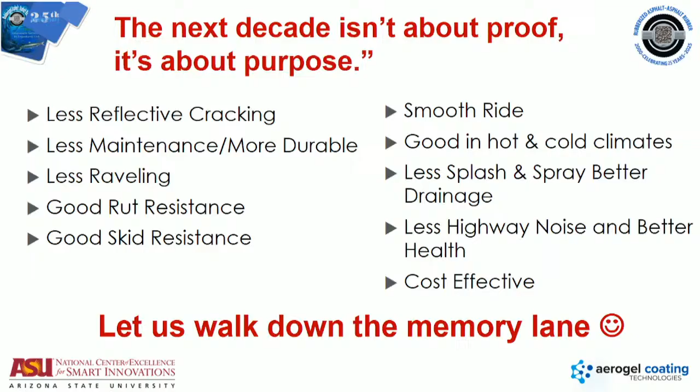The design for these mixtures was supposed to be a 10-year cycle - you come back, pull it out, and resurface it. Some of them actually lasted 15, and some are 20 years right now, still out there. Yeah, they have some issues, they age a little bit, they have some joint separation and all of that, but they've done wonderful. All the benefits in terms of splash, noise reduction, comparing to conventional friction courses that did not even last 6 or 7 years - just to give you an idea about the comparison. So that is the type of success that we have had.

Now, along with these types of friction courses, they came with a lot of bonus benefits, okay? What we defined in our community is the quality of life issues, the pollutant, the tire wear emissions. We documented that - George and I were in the tunnels, evaluating and trying to get all these numbers down. Exceptional performance, in terms of the amount of tire wear you get from an asphalt rubber surface versus a concrete surface in that case.

Reduction in urban heat island in terms of heat retention is one of the greatest benefits. I'll talk about that later, the thermal blanket effect that layer provides as a protection to whatever is underneath it, in this case Portland cement concrete.

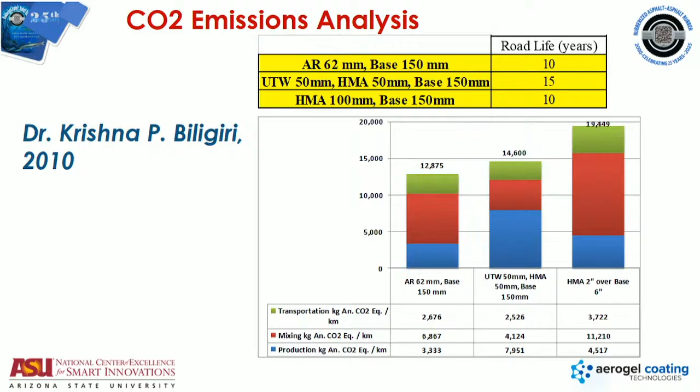So again, we win because of reduced thickness, and we win because of extended performance in these types of analysis. Needless to say, I can't imagine otherwise now.

We have tested every single angle, every test you know of in pavement engineering. Guess what, asphalt rubber has been evaluated through all of that. I cannot emphasize this enough, and it passed in most of these tests. But in some places where we didn't choose the right setting to conduct the test, we had some issues, and I'll talk about a couple of those, with a small message to address them.

Now, perfecting the process is very important. I'll recap this slide one last time. Choosing the right laboratory stresses when you apply any of those tests has to be equivalent to what those pavements see in the field.

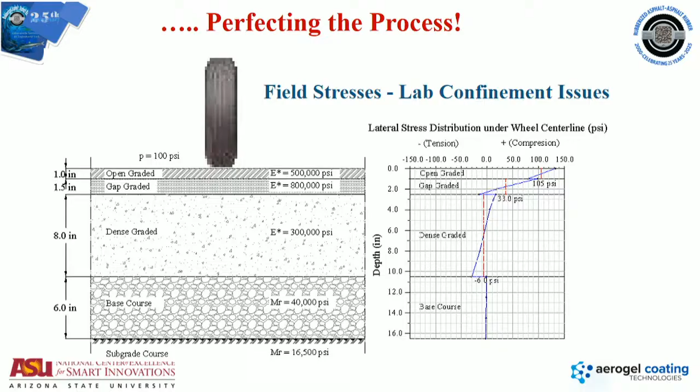We've established a lot of models over the years. Here's one example from another great professional, Krishna's colleague, back in 2010. She's at NCAT right now, Carolina Rodezno.

If you tell me what's the flow number, again, these are for gap-graded asphalt rubber mixtures, I can predict rutting performance based on the flow number, right? If you look up her dissertation, it's online, available for free. You can see a lot of these models out there. Tell me the traffic, tell me the thickness, do the test of the flow number, and you have some setting specifications, and guess what? We can evaluate how it's going to do on rutting and so forth, okay?

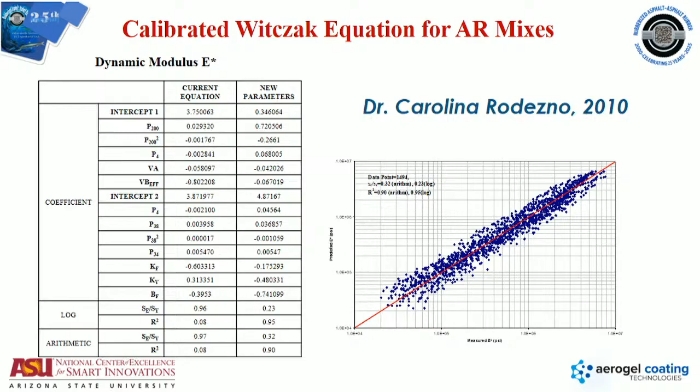So, actually there are a couple. What's the other Witczak equation, Krishna? There's a Shell equation people use for dynamic modulus. So we use the Witczak equation. Our previous mentor who passed away developed a prediction model for dynamic modulus. So we can do that for gap-graded mixes. It's available out there. You don't have to do testing. You can predict the approximate numbers and use it for that. And again, great result. The equation has been calibrated specifically for these types of asphalt rubber mixes.

And George and I, both Georges, we work on fatigue relationships, and we have all these coefficients. So when I asked that question early on for Krishna, are we calibrating? In our usage of the AASHTO software, Pavement ME, we have those coefficients that we can enter to have realistic output. Otherwise, your realistic analysis is not going to be there. So we use the K1, K2, K3 for all of these rubber mixtures that we have tested over the years.

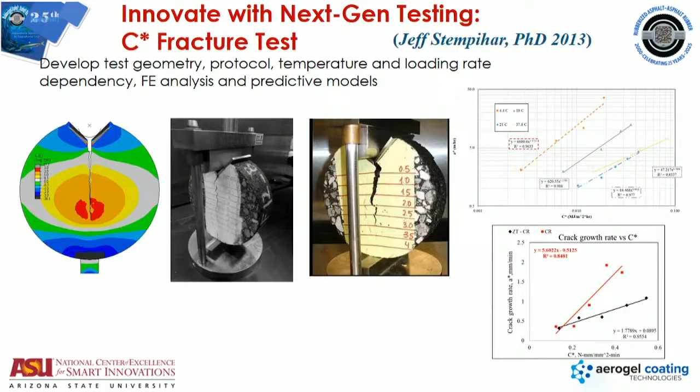Even moisture susceptibility test. This is a process by, he's now Dr. Atesh Nadkarni, and a lot of you here from the ASU group, you know who he is. He finished his doctorate at Texas A&M. But we developed a procedure to evaluate moisture damage using a modulus value, analogous to the TSR, but we called it ESR.

If I don't protect those samples in the test procedure, they might actually change shape, deform, just because of the nature of the unconfinement. So we provided the confinement, but we wanted that moisture to go through, and that's what we have been doing in terms of evaluating moisture damage and the ESR. Again, if you search it, there are some papers, publications, and reports, and so forth.

How are we doing here? I think we're doing great.

So the future of pavements really has to fit in this paradigm shift for smart, sustainable roadways, okay? And I will talk about a few of those examples and how we fit in. Climate resilience, there is no escape around it. Extreme climatic conditions are going to dictate how we deal with things, how we design future pavements, right?

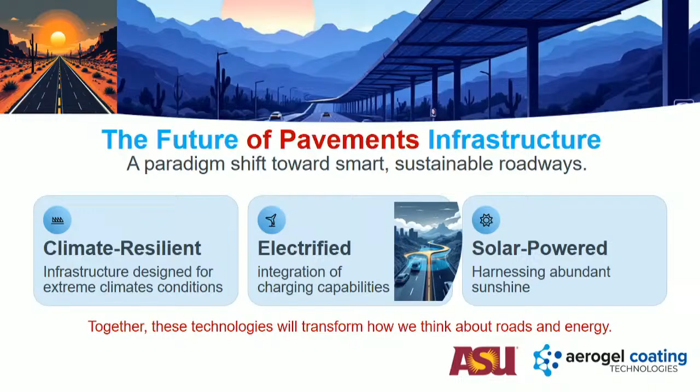And then the last one here, I heard the two Georges, and George Souza especially, dreaming up solar-powered roadways in the future. And guess what, it's not really far away. I think it's doable, very doable, right? So again, these technologies will eventually show us how to start thinking about roadway designs and selecting materials and so forth.

So the second part of my presentation, pathways to tomorrow's innovations. Some thoughts here on this. There is no escape. We're going to be continuing to use recycled materials, like crumb rubber from tires. We're going to be continuing to use RAP, recycled asphalt pavement, regardless, right? We have to find ways to make it work, how to put rejuvenators, how to select the proper percentages.

You will see a technology from Taiwan. They use 100% RAP, which has been kind of amazing in a way. Plastics, I think Krishna talked about plastic earlier today. So recycled materials is something we have to keep on our radar.

Energy efficiency also, there's no escape around it, especially in urban-centric infrastructure. Reduce urban heat island. In Phoenix, we estimate 40% of our landscape is roads, parking lots. And guess what? They add a lot to the heating mechanism. And it's a hot place to start with. So what type of technologies, what type of insulators, I'm going to talk about insulators later on, can really help in this aspect.

What about extended lifespan? I'm not going to elaborate because maybe I cannot elaborate on this. Look at this statement: the road of the future does not wear out, it updates. Think about a road that's not going to wear out, that just regenerates itself, revives itself all the time. So is it possible? Yeah, possible, right? Technologies are out there that can do that. But this is the future of how we are going to transform and design things.

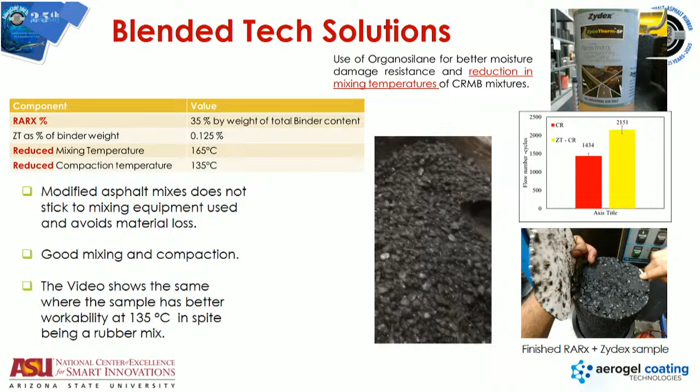If you are worried about these high temperatures, talking to Ezio this morning about overcooking binders, this will be the future of how we can take advantage of these types of technologies and so forth.

I do a lot of work with fibers. I've been doing it for 20 years. I love fibers. I think it's the best modifier ever that we have, in addition to crumb rubber. But the reason I say this, it does not take much. The cost is very low compared to everything else we have seen. And you don't have to change a mix design. You're putting some of these fibers in there in a specific way, and then you're getting a huge amount of benefits for the cost that you're putting in.

We have done, I didn't find the work, I'm sorry, but we have done fibers, again, combined technologies, the fusion of technology. We have done fibers with crumb rubber asphalt. Is it cost effective? Probably yes. I mean, all the benefit you get from the crumb rubber, right? In addition from fibers. Fibers are almost like good quality control, like a dummy-proof type of thing. You throw them in there, they help you to control the process.

Is Adrian here? Where's Andreas? Where's Andreas? Yep, you work with fibers. You know exactly what I'm talking about. And I mean, if you're talking, would love to hear what you have to say.

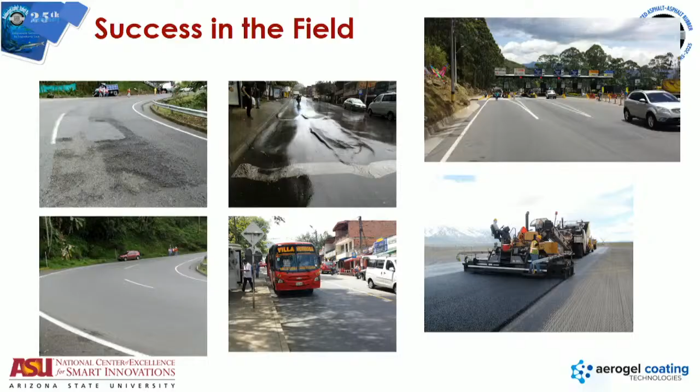You know, raveling and switchbacks and rutting and cracking. And I think this is an airfield in Wyoming at the bottom there. It was an open, actually, some type of an SMA mixture that also did very well. Krishna and maybe Alex and Jose, beside, oh, I've seen those over and over. Yeah, but they are great success stories, right?

So I want to wrap up here with the last 10 minutes or so, maybe less. So I talked about temperature impacts. Temperature impacts on pavements are drastic. Climatic effect and all of that is not only for deformation, but thermal cracking. The huge misconception about thermal cracking: a lot of people think thermal cracking only takes place in very cold climates. Alex is probably one of the few people who said, no, of course, I know because I've done all this work. Where does it happen?

It doesn't have to be in cold climate. It happens where you have a fluctuation of temperature. In Phoenix area, George built a parking lot for whatever experimentation you were doing at that time. It was fenced. No cars were even allowed to go in there. Did you get thermal cracking? You did. Why? Because of temperature fluctuation at higher. Going from like 35 degrees C to 45 degrees C is going to give you thermal cracking. You don't have to be at the low temperature.

So again, Carlos is here. Carlos talked yesterday. I want to expand a little bit, if I may. And we have, what kind of bird is this? Anybody knows? Raven? Crow. I think it's a crow. They are in Phoenix. You know the temperature in Phoenix? 46 C, 47. We push 50 sometimes in the summer. They survive. How do they survive? Anybody interested?

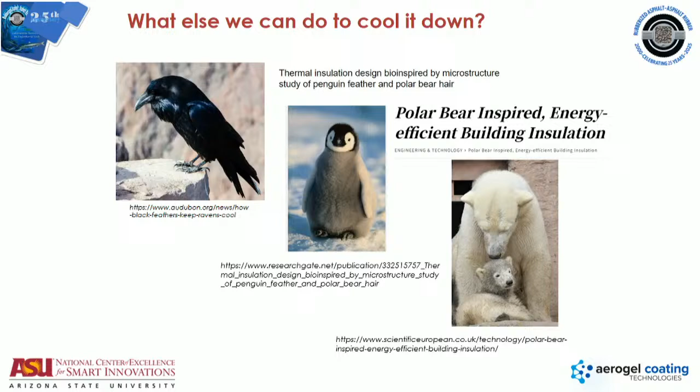So our inspiration when we talk about aerogel is increased porosity will be the key to reduce that temperature susceptibility. This is where we started, what was it, 6, 7 years ago, Carlos, Jose? It's been a while. And I have to put this cup of coffee in here because that was George Way's explanation when we had discussions over a couple of drinks of scotch here and there. He said, Kamil, I like what you're doing. It's exactly like a cup of coffee. I said, George, explain to me what's a cup of coffee. And I took that concept from him. Sorry, George, you did not patent it.

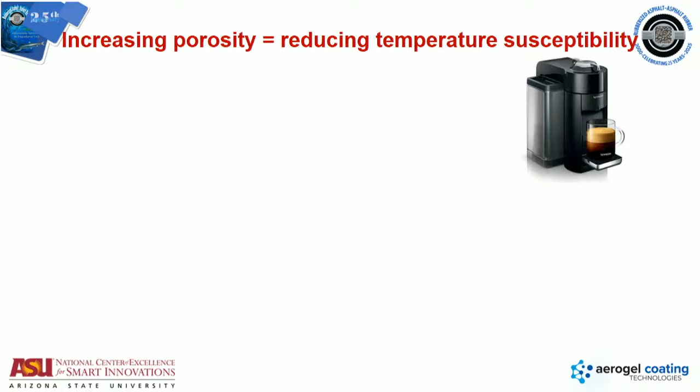But I have an espresso machine. With the espresso machine, we have this much longer coffee that you get here, right? But then when it finishes, you have that foam on top. And that foam instantly is cool when it's done. Why? Because of the porosity. It's a foam. Well, the coffee at the bottom is still hot, and it can maintain that heat if you don't touch it for a while.

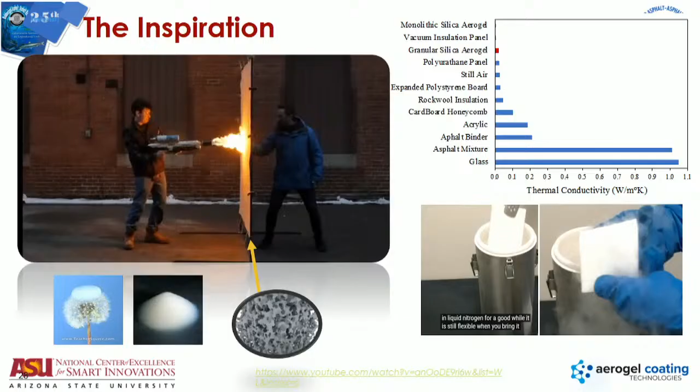Now, what we have done in our company, Aerogel Coating Technologies, the inspiration again: aerogel, what's aerogel? How can we use it? And Carlos did a great job talking about the history, but look at this. This is actually a blanket infused with aerogel and some other ingredients that has a fire resistance. Amazing, right? And the reason is nothing, George. Look at the bottom, the middle there. Look at the air void structure they have on each particle. It's very complex.

When they get all that liquid out, you end up with these little voids. This is really what provides that effectiveness of insulation that you use in coats, jackets, and everything else. And if I take one of these blankets and I put them in liquid nitrogen, if I put a tire in liquid nitrogen and I take it out and I try to hit it, what happens, George, to it? It shatters. Look what happened there.

Still flexible. You can go to YouTube. These are not our videos. These are actually, I should have put the links, I'm sorry. But they are actually still flexible. Why? Because of the insulation that it provided.

If you look at the thermal conductivity of a silica aerogel, you can even see it. It's above that red dot in 2 spots. It's like nothing, basically, right? So there is no thermal conductivity. That's what it's telling us there. So Carlos talked about the second generation of our product, which has aerogel, AMBX plus rubber. But this is our original.

I'm going to go very quickly here. And actually, it has a nice little video. Let's see if I can make it run. So here is the rubber alone, and I think we'll show you just a final image. A conventional binder, SBS binder, rubber binder, and then the aerogel binder. Last one standing. Of course, it melts eventually, but for the duration that we do.

And this is a brilliant test that Carlos developed to evaluate thermal susceptibility. So now we use this as a quality control for our product. When it comes in, you know, what works, what doesn't work. So again, amazing insulative properties. Little scientific fact how things develop in terms of thermal cracking.

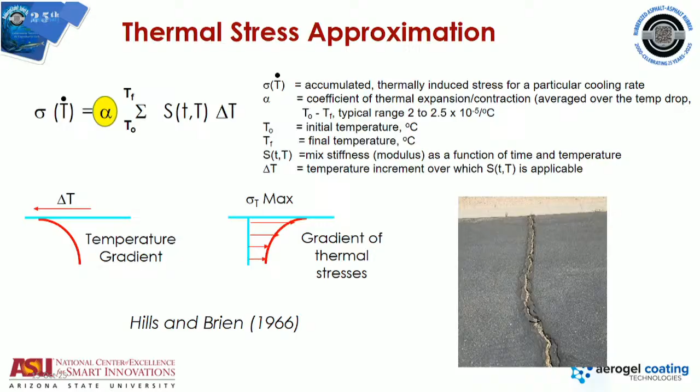Look at this again, you have a patent on this too? Not this one? Okay. Anyhow, this is a test where a sample sits on a frictionless surface, and then he cycles the temperature from 60 degrees C or 50 degrees C to -20 and up and down. But again, the message is look at the thermal coefficient of expansion.

The mix becomes insensitive to temperature fluctuation. That is the goal. Obviously, if you put too much of this aerogel, the material becomes brittle, more weak, right? So this is where the rubber comes in to help that or to optimize design. Done a lot of test sections. This is what Carlos talked about.

So our second generation product, we use the RAC, which is rubberized aerogel composite. Again, we take advantage of the crumb rubber with the aerogel to produce a super duper mix that can perform in a beautiful way. And I'll throw that out there. We have used technologies, Doug Carlson is out there, the Smart Mix, the RARX, and all of that, that can really help to fill in that gap for us here.

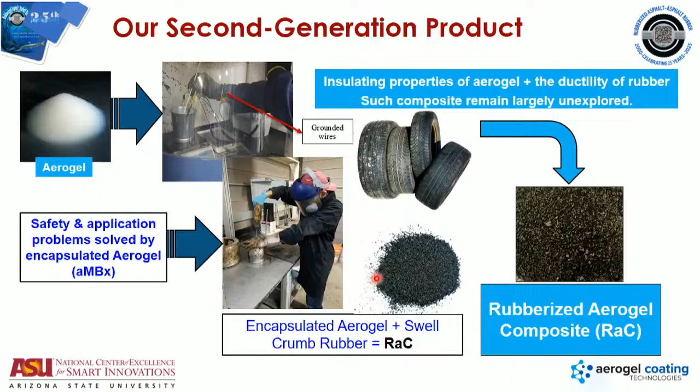Couple more slides, and I think I'll be just before my half an hour, my reduced time here. Be on the lookout for this technology. So again, we talk about this new concept, the new ideas, right?

So KHT, they have a booth out there. Is Tony here or no? They are sitting at the booth.

They use a resin modifier to use 100% RAP to have a cold mix. All these pictures were taken by me. I went to Taiwan, I was watching the process, how it's produced at the plant, how it's being placed, how it's being compacted. This guy in front of me was taking a reading, look at this, 33 degrees C.

That's the temperature of the mix going down and being compacted. They have a problem with the aggregates, so they try to use 100% RAP, and then they start adding crumb rubber to it. That's why they are here. This crumb rubber combined with these types of technology, the fusion of these technologies, are actually some of those features.

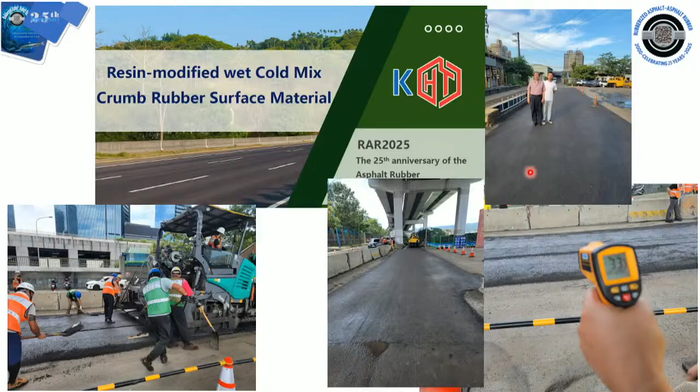I know there's a lot of product out there, but they have a highway section that's been put out there for the last 2 to 3 years. They have typhoons, or hurricanes as we call them in the US, excessive amounts of moisture and rain, and it's doing great. I've never seen anything like that in my life.

Okay, final thoughts. I hope we agree we don't need proofs anymore. Let's put that to the side and look for new ambition, new directions, new thoughts. Policy, obviously, is our bottleneck. It's not the performance anymore, right?

We talked about this, and maybe some of these thoughts could be for tomorrow's panel discussions, something you want to expand on. We over-proved the technology, but we under-communicated its value, especially with policymakers. I think this is really where we face our biggest problems nowadays.

I put this together after I listened to George Way yesterday. I think, yes, AI, we do everything in AI nowadays. Imagine AI-assisted mix design and predictive modeling. Imagine you don't have to do anything in the lab, you just do everything by an AI algorithm. Would that be acceptable to you as a designer? Would you be comfortable? Why not?

We can train these models. We have the information, we have the technology. So performance-based specification with real-time feedback loops, and all of that, just simulations. We don't really have to spend maybe more time in the lab if we have all the right components in there. We have to close the loop on this circular economy.

I think Alex did a great job talking about it, but the carbon valuation, we have EPDs, environmental product declarations, and this is something big. Products have to document their value, their CO2 footprint, their life cycle assessment, and so forth. I think this is really something we can build more on, instead of focusing on proving that crumb rubber is really doing great. It's doing great, we don't really need those proofs anymore.

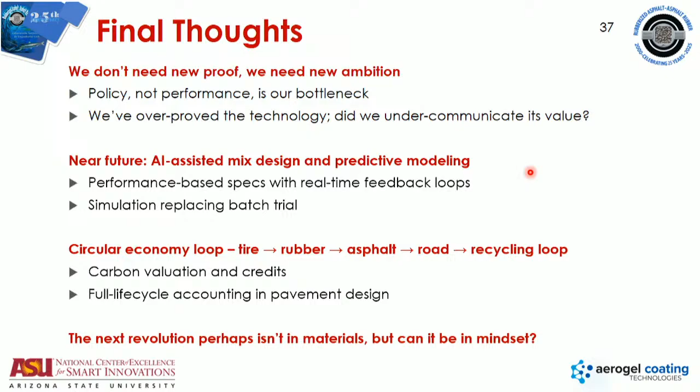I have a question for you. Yes, sir. The mic is not on for people.

Push it, just push the button, yeah.

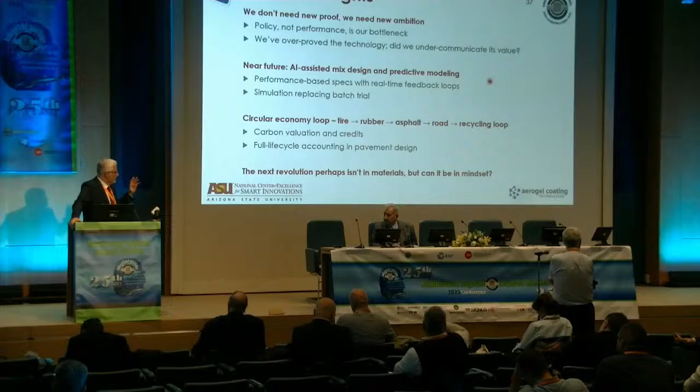So basically what you described is a thermal fatigue phenomena, cyclic stresses due to temperature variations. By using the aerogel, you're reducing strains in the material. You're insulating the temperature, so you have longer fatigue life. Not necessarily lowering the temperature, I am reducing the temperature fluctuation. The temperature might stay at a certain value depending on thick versus thin designs. For example, with concrete and porous asphalt on top, we found the average temperature stays higher than without the cover, but the temperature differential from top to bottom is reduced, and that's what we're after - reducing temperature changes in the layer to minimize the thermal stress. So it's thermal fatigue stress, but we shield it by designing a certain amount of particles in there to achieve that.

Yes, thank you, go ahead. Here comes trouble. So it's very interesting technology. Congratulations. Thank you, it's great to see new ideas in the industry.

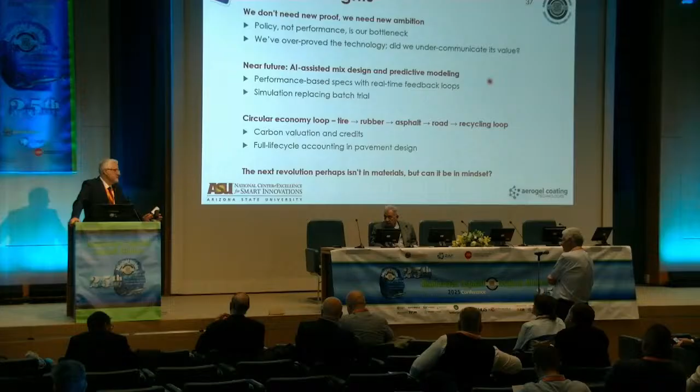How do you feel when you look at this product with ages? You live in a very extreme location for aging of materials - at 1 year, 2 years, 3 years, 5 years aging, how do you feel it might perform? So we don't have a lot of data on aging yet, this is coming. But anytime you reduce thermal stress, you would expect, logically, to have less aging compared to a conventional mix. If I can shield my pavement completely, there's no aging going to take place, or minimal aging.

Now you had that great slide with the flamethrower on the pavement. If you look - not pavement, it wasn't pavement, yeah. If you put that on the pavement, do you think you can go through many cycles?

A very good question. In fact, Carlos will be speaking in November at our conference about fire resistance pavements. We haven't done a lot of work in this area, but these particles will serve toward that goal. They might not be completely fireproof, but they will help reduce - for example, in Arizona we have a lot of fires during certain seasons. If we can put our product in areas we know are potentially for fires to sweep through the roadway, we give people a chance to travel these roadways before they completely disappear or melt out. So we feel we can provide that protection with these particles, but we don't really have all the data to document it yet.

Fire retardant materials are actually quite important in the asphalt space in certain markets. So thank you very much. Thank you, thank you, appreciate it. Go ahead.

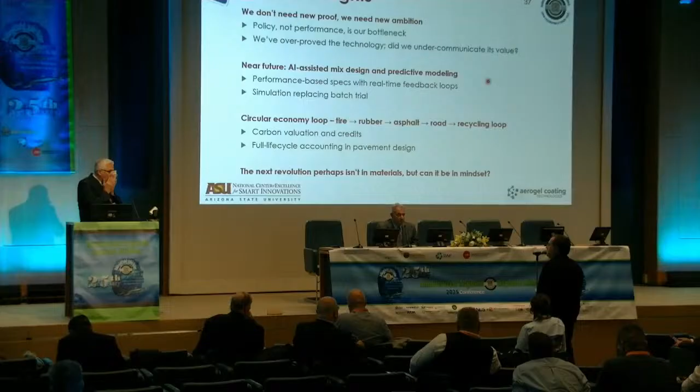Two questions. One question: when we're adding the rubber product, can we see some reduction of bitumen when you use the combined technologies, rubber and aerogel? I think the idea is our particles will have additional binder anyhow because they are pre-coated, so it might give an option to reduce some of the binder content, but it doesn't really affect it this way, Carlos? Okay, so I would say that doesn't.

The question is about this thin layer of asphalt, what you remove from the concrete - how is the connection between this and the thermal cracks? Are you cutting it, or what happens with thermal cracks? So the resiliency, like George Souza explained, this is 5 times the resiliency with the rubber, so you get the benefit there. Any joints or potential cracks in the pavement do not really reflect through, it's kind of hard. Now if they do, they are much reduced in width compared to conventional mixes - we have seen that.

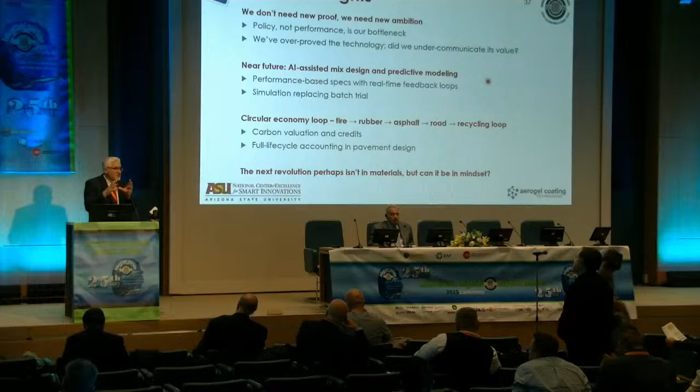But again, this is a friction course layer, it's not intended to be an interceptor to any major cracks or joint movements. So just accept that it's more of a thermal blanket, friction, splash resistance and so forth - its function is designed for other benefits, but not necessarily to solve major joint issues you might have. I think we apply a tack coat before you put it down, and this is how you bond it - just like a regular tack coat.

No SAMI, no, this is the friction course. When we do a gap-graded mix, like the one in Jakarta that George Souza showed, he used a SAMI, then put the gap grade and the friction course on top. So in that case, yes, because it was more of structural sealing and adding more benefit. But in our case, we were looking for other benefits, not necessarily the structural capacity and so forth.

It looks like George ran out of chocolate today. He's not distributing chocolate. He has a lot of chocolates, yeah. Oh, there is? Okay, well, go ahead.

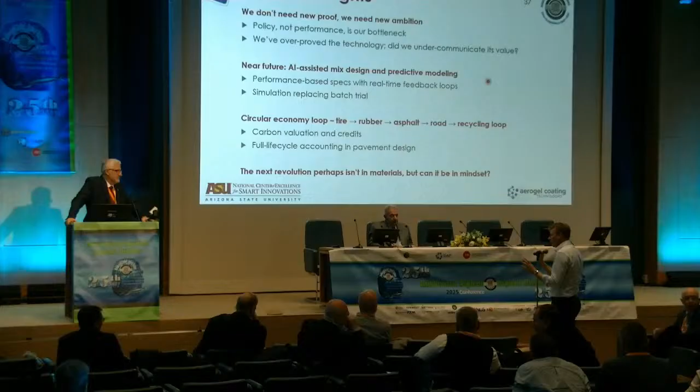Do we have time for another one? I think so. Thank you for a very nice presentation. I think the last slide here was a very interesting conclusion about the communication. But I think the research going forward is also important, and maybe we should also shift our focus into how to actually communicate and sell, and how to penetrate the layer of denial and ignorance that we still see out there in some markets. So maybe to advocate for future topics at this conference, we would also attract more people.

Thank you, I think it's really, yeah, thank you. Thank you for the feedback, it's like in politics. This slide can go for politics as well, right? I mean, it's the same thing. It's what we do in our community. So yeah, thank you, appreciate that comment.

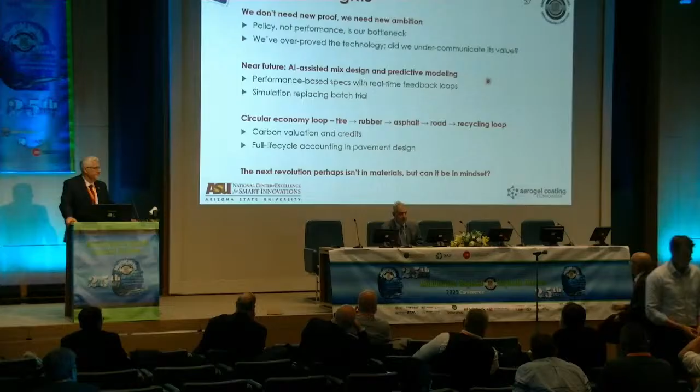Thank you, thank you, let me go. Nice job, thank you.

Our next speaker, I don't see her. Antunes' evaluation of sustainable pavement construction and maintenance using multi-recycled RAP mixtures.

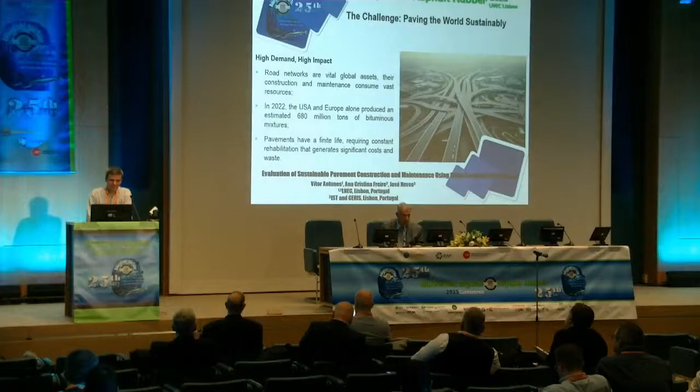Sorry for that, but the PowerPoint is advancing the slides after some time. Well, as we know, the road networks are very important for societies, for the countries, for their development. We know that. It's true for everyone in every place of the world.

In 2022, only USA and Europe produced around 680 million tons of bituminous mixtures. It's a huge number, only these two continents.

We know that, and we are talking about pavements, and the pavements need to be maintained or rehabilitated after some time. For this, we need to replace or substitute the layers, namely the surface course. With these maintenance actions and rehabilitation, we produce RAP. RAP is a material that comes from the old pavements, as everybody knows in this room, of course. And this is an excellent material - we have aggregates and we have bitumen, the two raw materials to produce bituminous mixtures. To shift to a circular economy, we need to use that material, and with this material we can have a sustainable pavement management.

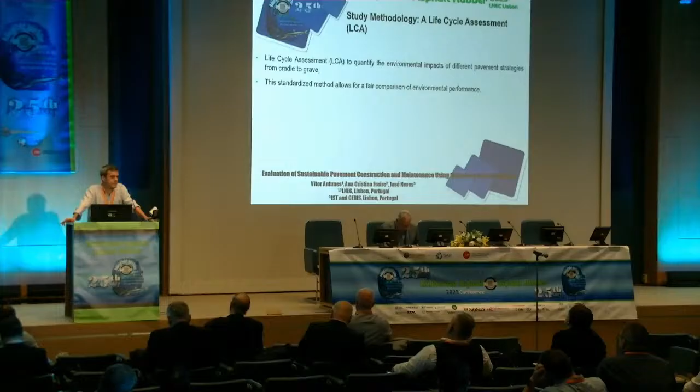To assess this, we can perform some life cycle assessment to quantify the environmental impact, but it's important also to quantify the sustainability overall, considering the economic impact, the social impact, and the environmental impact. The LCA is a standardized method and allows us to perform a fair comparison between the scenarios that we want to analyze.

In our case, we define the functional unit as 1 kilometer road from the Portuguese road network. It's a 2-lane road section with 7 meters width, and we analyze over a period of 36 years. We have two scenarios: scenario A, the real scenario, with the millings and rehabilitations that were really performed, and scenario B, the same scenario but the sustainable one, using some amounts of RAP. We define 25, 50, 75, and 100% of RAP by performing hot mix recycling.

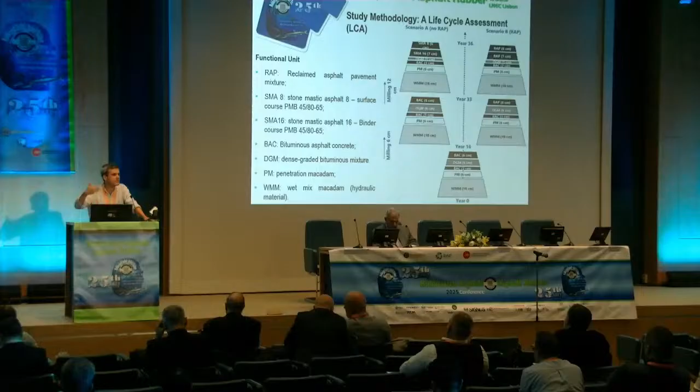We have these structures, and we have the different layers and the milling actions at year 16 and at year 33. For the second milling, we considered that we use the previous mixture with RAP. And because of that, we are talking about multi-recycling, recycling the mixtures several times, of course, using rejuvenators.

To perform the analysis, we use the SimaPro software, combined with the Ecoinvent database, and some consultation of the Portuguese paving industry to complement some variables with real data from Portugal. To assess the impact categories, we use the endpoint normalization and the midpoint impact categories using the IMPACT 2002+ method. And we have 15 characterization factors and 4 damage categories.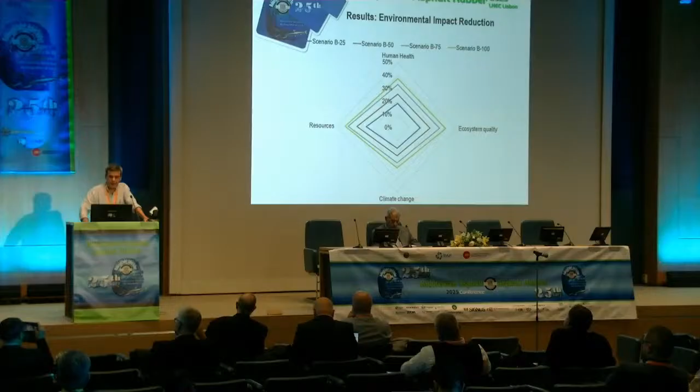This represents a significant reduction in terms of virgin materials consumption, because we are using a material that allows us to reduce the amount of material that we need to extract from nature.

We have a reduction also in terms of environmental footprint, because we are reducing transportation, and the processes associated with processing RAP to incorporate in these new bituminous mixtures are very small, because we are talking about grading and crushing only, and we are reducing transport as we have material closer to the asphalt plant.

Multi-recycling improves this reduction in terms of impact factors from virgin material reduction, less transportation and improved energy efficiency. And we improve also, they are all connected, the energy needs, because we are reducing transportation, we are reducing the extraction of raw materials, and we are reducing the actions to produce bituminous mixtures, as we can also incorporate, for example, warm mix asphalt to produce this type of mixture.

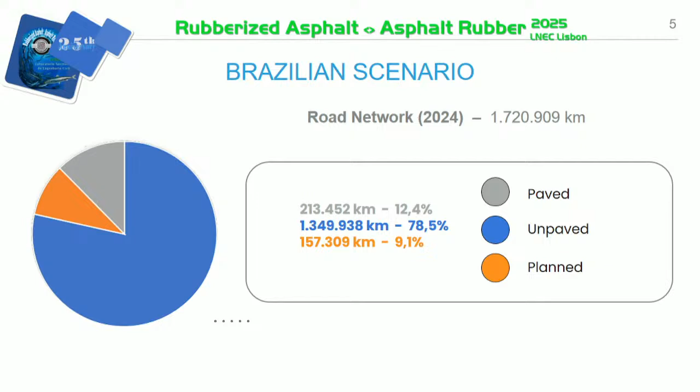Brazil has approximately 125 million vehicles. Each year, around 450 thousand tons of scrap tires are discarded, equivalent to about 90 million individual units. It's a big country. CONAMA resolution requires the collection and proper disposal of used tires, establishing a ratio of one recycled tire for every new tire.

Pavement chains in Brazil. More than 90% of asphalt used in Brazil is produced by Petrobras, the company responsible for manufacturing asphalt cement. Asphalt in Brazil is still classified according to the penetration test, and two main grades are commonly used: AC 50/70 and AC 30/45. The country is currently in a transition phase toward the performance grade PG classification system, which is expected to be fully adopted soon.

The distribution of asphalt cement is carried out by transportation companies using their tank trucks. These trucks collect the asphalt cement directly from the Petrobras refinery. Part of it is delivered to hot mix asphalt plants, while another portion goes to asphalt distributors. The distributors modify the asphalt cement, produce and market asphalt emulsion, and modify asphalt with polymers, SBS, and crumb rubber.

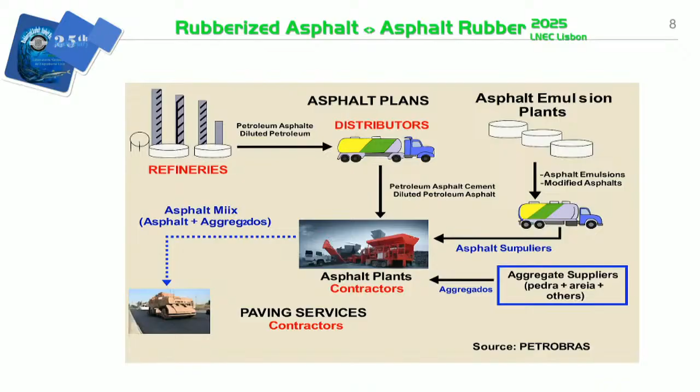Therefore, it's important to establish the methodology to evaluate the solubility of asphalt rubber in trichloroethylene, the most used solvent in Brazil. This allows for proper assessment of storage and handling conditions of asphalt rubber in customer tanks, as each production and storage process might have its own characteristics. ASTM D6114 is the base.

Asphalt rubber is defined by ASTM as a composition of asphalt cement, ground tire rubber, and additives, containing a minimum of 15% rubber by total weight of the mixture. It's crumb rubber, and two machines. In the production of asphalt rubber for this study, two types of mixers were used. The low shear mixer was employed only for the dispersion and swelling of the ground tire rubber, while the high shear mixer was used to extract the polymer components present in the tire. The portion of the tire utilized is the tread layer, which contains the highest concentration of polymers.

Now, we can observe all the constituents of crumb rubber. To produce this material, it's essential that rubber powder exhibits a high level of purity. It must be free from steel and nylon, and we have to control particle size distribution.

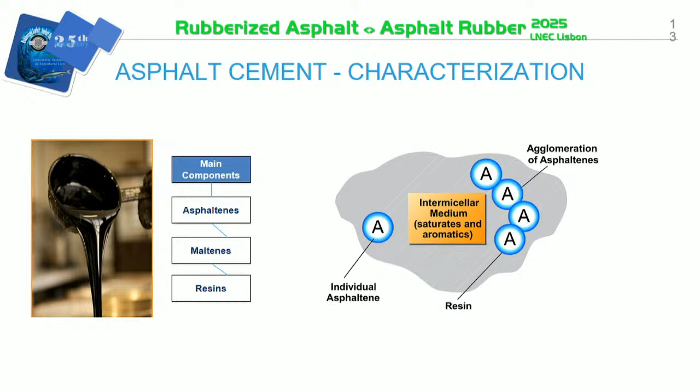Therefore, it is necessary to adjust the formulation of the asphalt cement using rejuvenation agents to restore the proper chemical equilibrium and ensure consistency and performance. The different types of crumb rubber were analyzed in order to determine which sample would be most suitable for the study. The sample with the highest degree of purity was selected for further testing.

The study focused on the wet process methodology, which involves the dispersion of solid particles into a liquid at high temperature, followed by a high shear mixer. The process time for sample production was 4 hours. Presented here are some of the results obtained after the dispersion and high shear mixing stages.

The dispersal and solubilization of rubber in the asphalt binder were observed through several behavior changes, including an increase in softening point, a reduction in the penetration, and an improvement in the elastic recovery of the binder. The study focused on crumb rubber type 1, which exhibits greater elastic recovery and high polymer content compared to the other samples. The penetration value decreased, while both the softening point and dynamic viscosity increased, reaching nearly 2,000 cP.

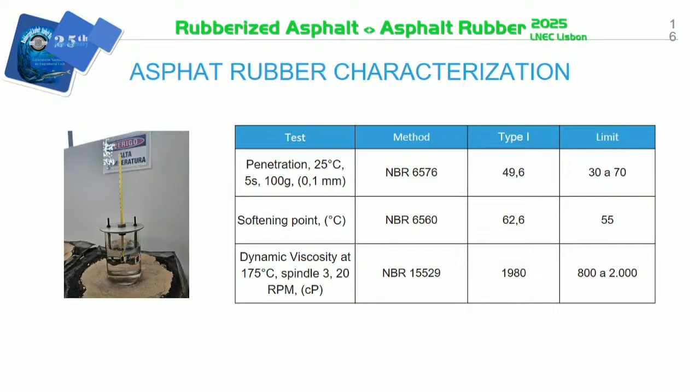Laboratory tests and machines. Here are the laboratory instruments used in the study. The rolling thin film oven, which simulates short-term aging, the dynamic shear rheometer, DSR, and the solubility in trichloroethylene apparatus.

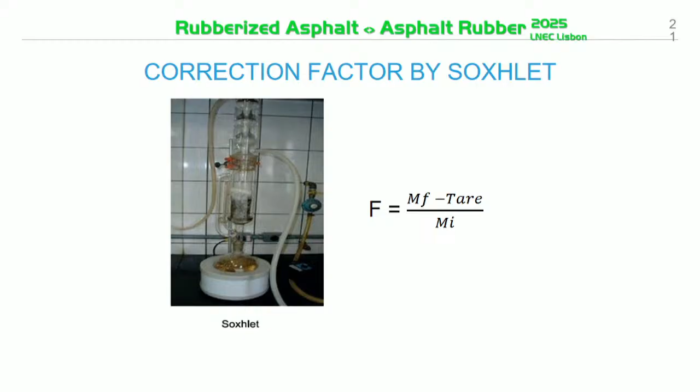And in conclusion, the Soxhlet extraction method is effective to determine the insoluble content in rubberized asphalt samples. The solubility in trichloroethylene is directly related to the purity of the crumb rubber, influenced by carbon black, metals, and textile fibers. It is recommended to perform a test during production and storage, with continuous recirculation and agitation to ensure proper rubber dispersion.

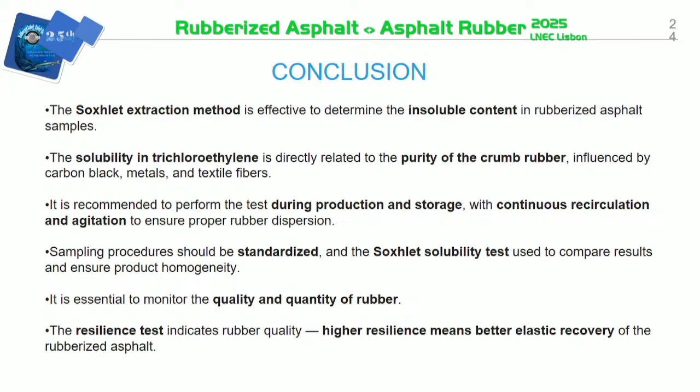Sampling procedures should be standardized and Soxhlet solubility tests used to compare results and ensure product homogeneity. It's essential to monitor the quality of rubber. The resilience test indicates rubber quality. High resilience means better elastic recovery in rubberized asphalt. Okay? Thank you.

May I? Go ahead. Hello, I'm presenting this on behalf of, no, not this one. Angelo Pinto. What is the presentation name? 15, 14? It's not here today. Fernanda.

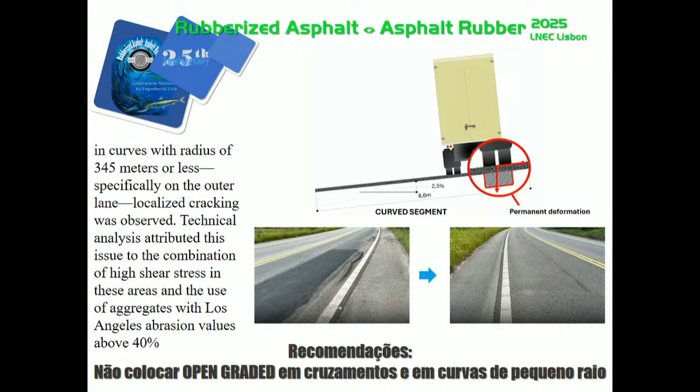It's reminding me that these only happen on curves with the radius less than 345 meters, because of the high shear stresses. This was 33 kilometers long. What was there before was, you and I both know, horrible. This is 15 years old.

When we did this to begin with, we didn't know it was going to last 5 years, because of this LA thing, 10 years, whatever. But notwithstanding these few curves, this is a fantastic project. I think that's what should be brought to people's attention, the amount of savings here. This is now, to me, one of the perennial stretches of the roads I drove in Brazil. Tremendous performance. Maybe a little more should be made out of that, rather than something happening here that's an anomaly.

But by the same token, the whole road was built with this aggregate that we're concerned about. This was brand new, everything. In some ways, this is not exactly what we had in mind, because we were thinking of putting a SAMI down. But we didn't do it, because the aggregate was not good. But it is why it's important to show that the structural performance is excellent.

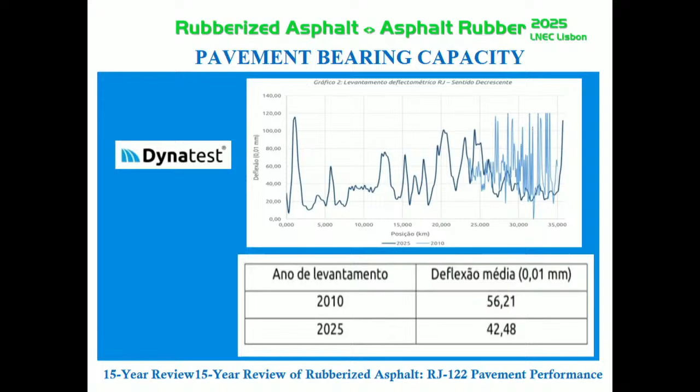Yes. Well, all I'm going to say is this was a great job, and we did fantastic work here, but we couldn't have done it without Angelo and all of his good work. And these little rut things are an anomaly of 33 kilometers of a road that was horrible to begin with. Think of the savings, as you showed in that one slide. Huge savings. The alternative would cost much, much more. That's another paper where we already show this. Even that aggregate was on the entire project, right? Exactly. So to me, this is a validation of exactly what Emil was talking about.

Over and over again, we have evidence of tremendous success. And at times, maybe we dwell too much on the little things. This, to me, I think, is minor. You want to have a question? Okay, can I? Angelo wants.

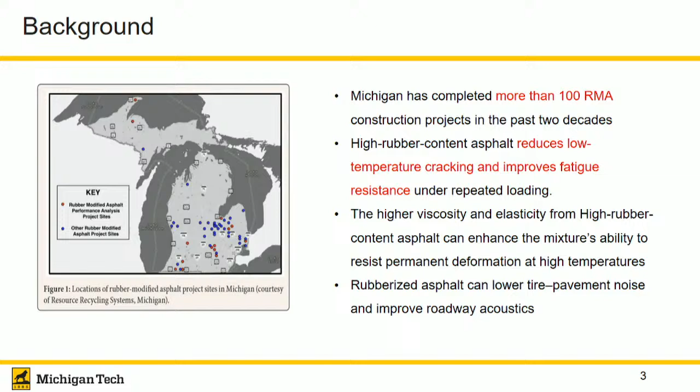That means about 640 kilometers of lane miles. That is the current situation.

Next, I'm going to show a few examples of case studies. We have a few places where we built those projects. Some projects I think are really interesting, and I really want to show what that is about.

The first project is in Kalamazoo - the place where the COVID vaccine was born. In this project, we have a few miles long stretch, and we divided it into several different sections: some are control sections, some are other sections.

We also have rubber asphalt sections and chip seal sections. The chip seal is pretty much similar to what Arizona did, and also what California did with rubber asphalt chip seal. So that's the reason we have 4 different sections here.

So I'm going to show you one section here, and in this picture you can see one gentleman wearing a hat. If you look around the room, if you see anybody wearing a hat here, this is a handsome guy. All right, so now the hat is gone.

This guy - I work with this gentleman, Dr. George Souza - we worked on this project together. This was one of the first projects where we attempted to use a really high content of rubber materials. This is the dry process. It was the first project we tried it on, and the construction, everything went fine.

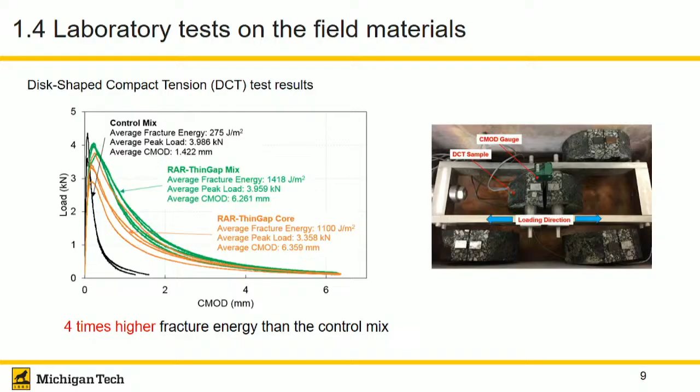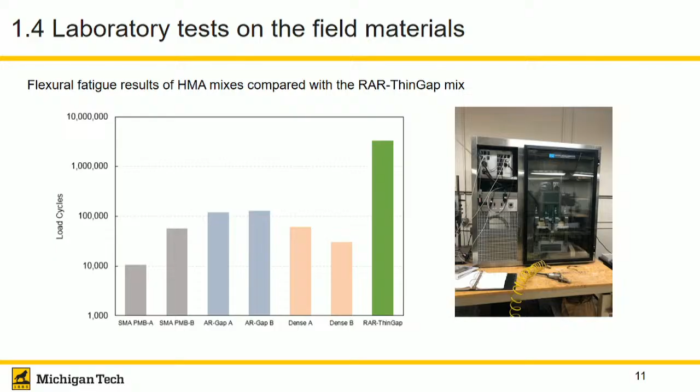We also measure the flexure fatigue, basically trying to find out the fatigue life. The control asphalt, which is the gray bar in front, you see it's pretty low, but the rubber asphalt is pretty decent, right? Very good - several magnitudes higher. So that gives us pretty much confidence about the materials we're using.

So at this speed - this is one question we discussed with Dr. George Souza, and at that time there weren't many Teslas available. He encouraged me to find a Tesla and drive on it, to find out what the noise reduction quality looks like. Anyway, eventually we did not get a Tesla - we got a diesel truck, but that's okay.

So what my point here is, there's a lot of really good performance we found here. We pretty much verified that crack resistance at low temperature is really good - you get very good fracture energy resistance and very good fatigue resistance, 50 times better, right?

And of course the other thing is about the noise level - it has been improved quite a bit, right? On average about 2.5 decibel points, but in some cases 4 or 2, about those ranges. The rutting resistance is also good. So what else do you want, right? That's pretty good.

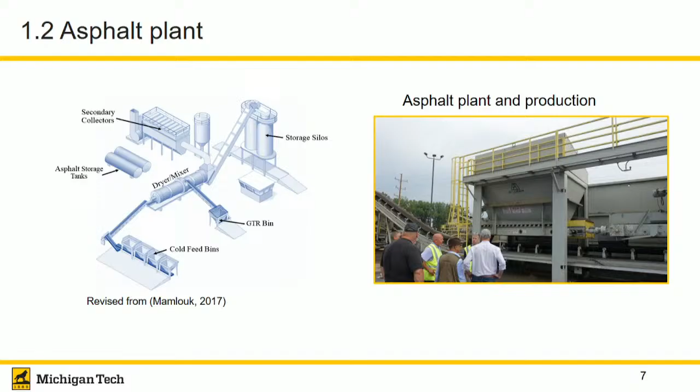So this is the project we have here. It's called the 6 Mile Road - a total of 6 miles stretch as control section and about 2.3 miles as our rubber asphalt sections.

So this road was in a pretty bad situation - I'm going to show you how bad it is in just a few minutes. What we designed here, the underneath was concrete pavement over 100 years old. They patched it a few times and added asphalt on top over the years, so now you see bigger cracks happening - it's a very bumpy road.

This road is called Dixie Highway. For people really in the U.S., they know this is a Dixie Highway road - it's very famous, right? Because from here this road goes all the way to Miami, Florida. Anyway, I don't want to talk too much about the history, but really the pavement surface is bad. So eventually what we designed was a rubber asphalt chip seal as a SAMI layer, and then on top we put 2 layers of rubber asphalt.

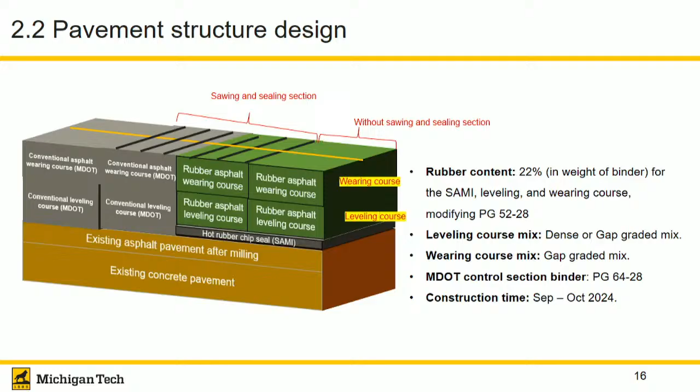So anyway, here's what the condition looked like. It's very bad, right? Very bad. So here is what we did.

Okay, so first we need to mill a little bit off. It's roughly about a 2-inch, so about 5 centimeters, of material off. So we mill it, and then we have rubber asphalt

materials to apply on it. This is hot rubber asphalt, not emulsions, not emulsions. So then with that, you apply chips. This is the exact same thing like Dr. Souza and I did in Kalamazoo for a different sectional project.

So this material here is a raw material. It's just the rubber strip that you get from tires. Without any process, without surface treatment or anything, we have to cook this for a longer time. After that, the project is cleaned up, and then this SAMI layer is kind of ready, right? It's kind of ready, you clean up.

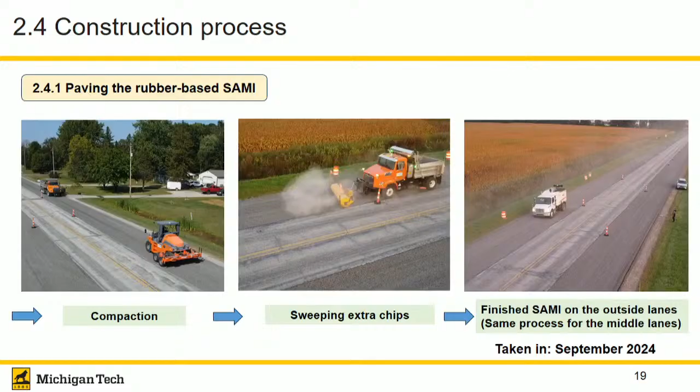And then, of course, we place it on. This is how they prepared the materials here. So how they really prepare it from the PG 52-28, and how to really modify it with rubber materials.

So then, with the high content rubber materials here, roughly it's 22% by weight for the binder. So it's pretty high content here. And of course, the temperature used here was a pretty decent temperature, very decent. All right, here is when the rubber asphalt was prepared.

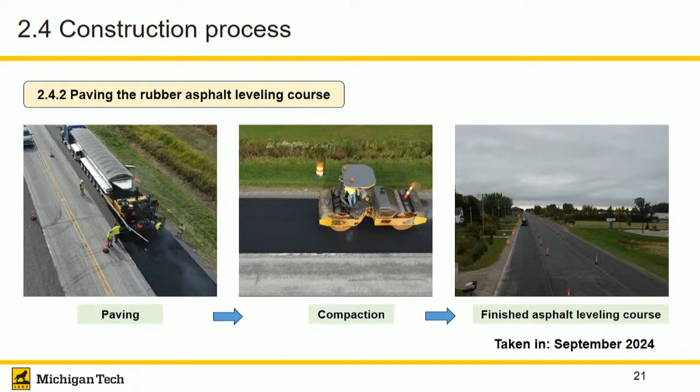Of course, this is the wet process. The previous project I mentioned to you, that was actually the dry process project. Here's the wet one. So this wet one, because of 2 layers, they get the first layer on, and after that, we get a wearing course, same process. The good thing for this project was the 2 layers used the same asphalt materials.

Of course, we also have the other 6 miles of roads. Those are the control materials we are using. Those are using DOT's standard mix design.

All right, here is what the construction process looked like. You can see this is them spraying tack coat. This tack coat has to be emulsions for this case. We eventually constructed the middle 2 lanes, and then just constructed the outer 2 lanes. This is a total of 4-lane roads.

So anyway, you can see this was the construction site, in 2024. After the compaction, after finishing the construction, things are looking pretty good. We did a lot of lab work, trying to re-verify a lot of things here.

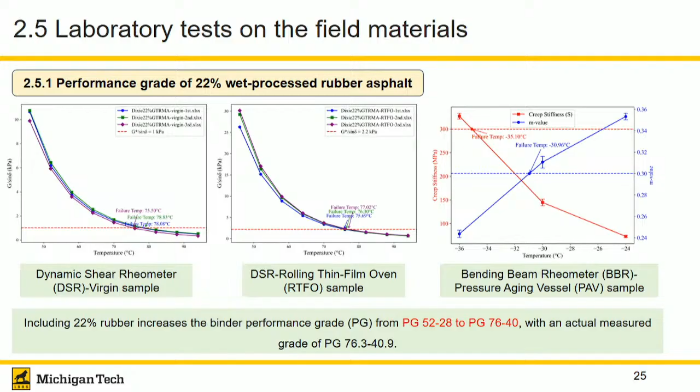I'm going to just maybe skip these things. So we tested a bunch of things like DSR, RTFO, after the aging, after long-term aging, to see what the performance looks like, just to re-verify what the new PG should be. For the mixture testing, we tested a lot with Hamburg wheel testing machines. We ran the APA testing, all kinds of diagnostics we have.

Anyway, we also tested our favorite testing called the DCT here again. We also tested ideal CT, that's another thing people are using. But really what my point here is, the cracking resistance gets pretty good, right? This one gets 4.4 times better than the regular materials.

And we tested a bunch of other things like dynamic modulus, because in the design we have a component trying to do a pseudo mechanical empirical design. We have that in our mind. We think this road is going to be a perpetual pavement, because the foundation was good, old concrete, even though it's 100 years old. There's some decent asphalt layer on top. Plus these 2 layers of new asphalt should last for a long time. Right, let's see what happened next.

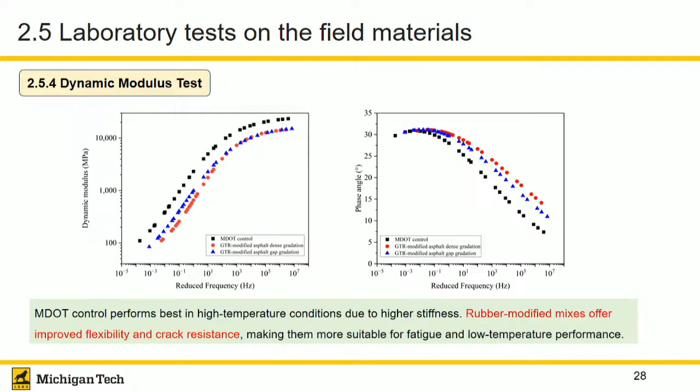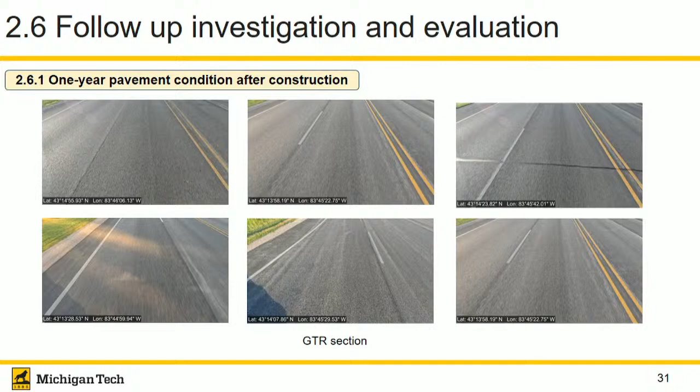All right, so let's summarize this project. It's 6 miles of control asphalt, 2.3 miles of rubber asphalt. So the total rubber asphalt we used here was 17,000 tons. That's probably one of the largest projects ever in Michigan. So that's the reason I said large. But of course, compared to some projects we have, it's not really that big. All right, so we should be okay.

So this is all the things. Of course, the project is wet processing. Crack resistance improved, moisture resistance is good, rutting resistance is good, fatigue life is good. And the construction was smooth. Of course, we learned a lot of things along the way, but in general, it's a pretty good experience.

This is my second project I want to show you. This place was also relatively cold, but not as cold as the other project I'm going to show you. This project is called the Dickinson County project. Dickinson County is over here. You see, this is the Upper Peninsula portion, this is the lower Michigan part, and it's right here. So it's pretty cold here. This road is called County Road 573. It's a cold road, an old road also. It connects the mines and the logging areas, so a lot of logging trucks, mine trucks.

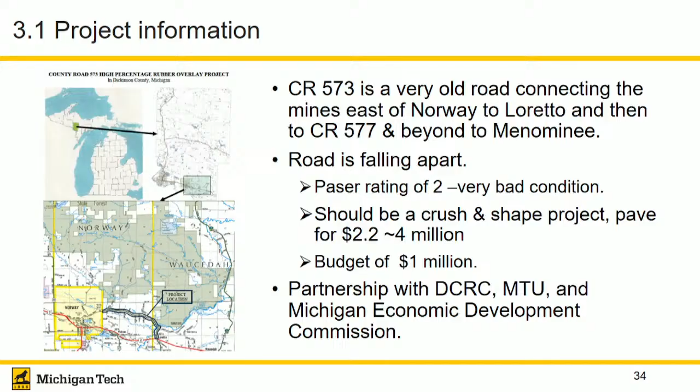All right, so it's a pretty long stretch of road. You see what the road looked like. This road was built in 1989, never touched. And the other piece of road connected to it was built in 1993, never touched. So pretty much a long time, right? A long time, not much work done, and it's cracked like that. So it's a very bumpy road for the logging trucks and mining trucks.

Of course, I have a video here, but we probably don't have time to show it. We can just skip it, I guess.

All right. So of course we did a lot of lab work as well. We tested all the binder properties. If you take a look on the right-hand side, this is the rubber modified asphalt with 20% rubber in it. So the binder really got improved quite a bit. You see the temperature is bumped almost 20 degrees C, right? On the rutting resistance side. So that's really very good.

Of course, we have a lot of data showing what the actual PG looks like. I'm going to show you something. For example, we also tested something called the asphalt binder cracking device test. It's basically trying to see at what temperature the asphalt binder will start to crack. The conventional asphalt will crack at around -40. This is fresh asphalt, not aged. And the other one, after we make rubber asphalt, you can see it cracked at around -50 degrees C.

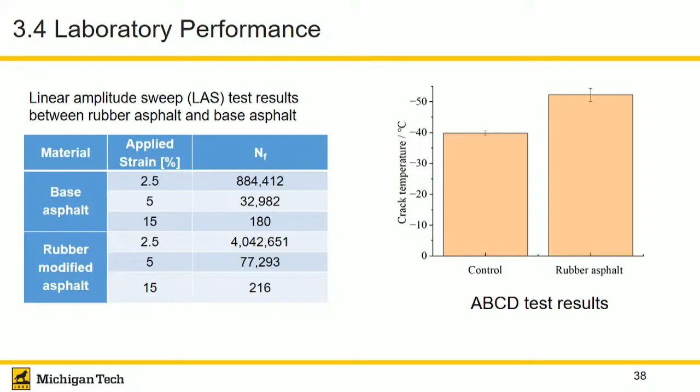without really sufficient budget. All right, so what we did was we also tried to do the mix design, just to help them get the design ready. And we measured the rutting performance and measured the fracture resistance. And of course, the fracture resistance improved quite a bit. For example, here, the 500 joules per square meter, we can improve that to like 650 or so, right? That's one of the results I really want to show you. And the rutting resistance also got improved.

And here's before the construction, the road was looking really very bad. But after construction, you see it's pretty decent, right? Well, this is the U.S. Of course, the center line is always yellow, right? It means don't go through. All right, don't pass.

And the Bay County one, this one is also another similar project. This has been almost 5 years. That's the reason I really want to show that one here. This one I think is a project we worked on with Liberty Tire. Liberty Tire, are they here? All right, great. If you're not here, I'm not going to talk about it.

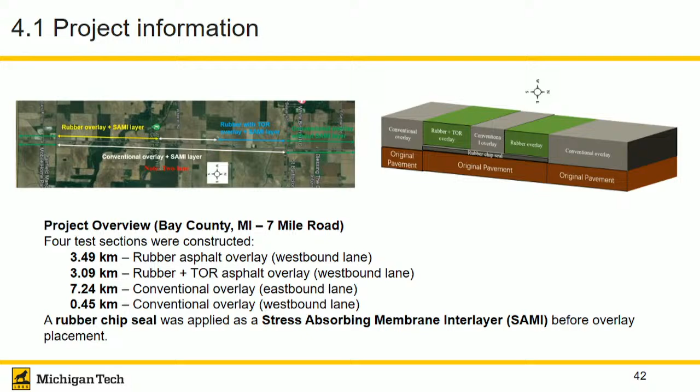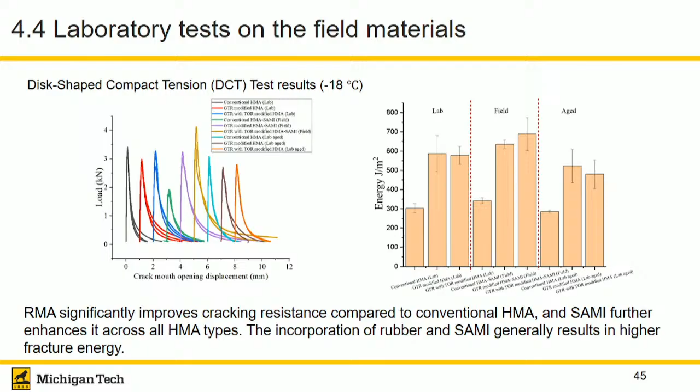And I also want to have one slide showing what the actual fracture energy looks like. On the left-hand side, all the first bars, this one is conventional, this is conventional, this one's conventional, but the rubber asphalt, you see they almost double the fracture resistance. That's really good, right? That really means the road is not likely going to crack, or it's very difficult to get a crack. I have results to prove that. All right, we also tested rutting, and I'm going to skip this one for now.

And we test all the noise levels. So for all the rubber asphalt we see, even at different test speeds, usually the rubber asphalt is quieter compared with the new conventional asphalt materials. All right, so that's the noise level.

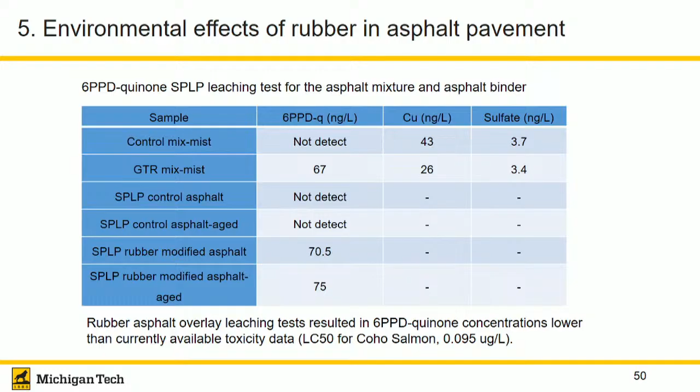The limit was 0.095 microgram per liter. So that means we are still not in that range yet. But of course, we are researching more things here.

Another project, instead of on the roads, we constructed with TDA, tire derived aggregates. In this project we also measured zinc, iron, magnesium, and copper. Eventually, the leaching potential was still lower than the suggested maximum value. Of course, this is not the end. We are at the very beginning of measuring this type of data.

Another project we just started this year: we bundle the tire chips together into one big block. We hope this kind of block can treat storm water and remove contaminants, because the surface area of those chips is really large.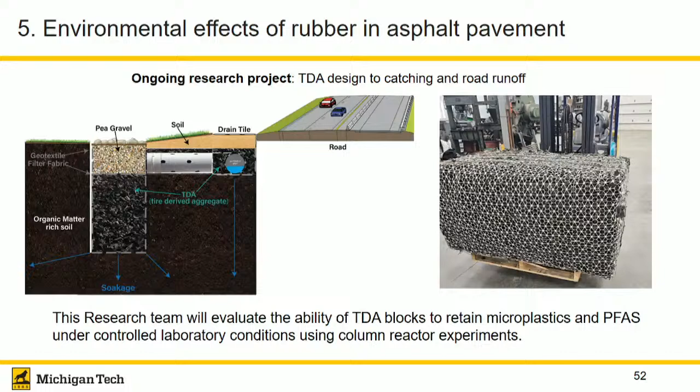So there is maybe a potential for it to be used as a filter. This is ongoing research work, and you see this big block here. It's roughly about 1 ton, and it's pretty heavy, so we have to use equipment to lay these down. Right now, the initial study shows that this one is very effective, but of course we are still working on it. This is probably about 1 meter tall, so pretty big materials here.

I'm glad to see there is a lot of research work on the Environmental Product Declaration, EPD. This is something we are doing. We are teaming with state agencies and local governments, trying to make sure whatever EPD we have here is within a relatively narrow limit. That means we really want those numbers to be below 50% of the entire country's number on the initial EPD.

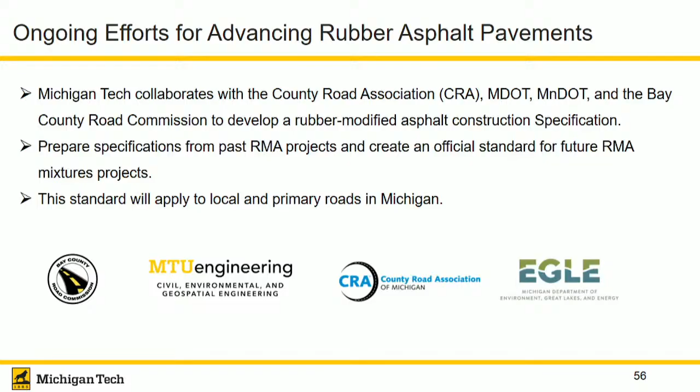One big project we're dealing with right now is that I'm being asked to write the specifications for the state. That's the reason in the last day or two I'm talking to different people, asking their opinions on what we do with the specifications. One specification is rubber asphalt chip seal, the other is rubber asphalt mixtures. So if you receive an email request from me or my colleagues, please don't be shy to help us. We really want your input to get rubber applied in more locations.

Thank you. Very well done, and right on time. I don't know if I should ask for a question or not. I don't think so. They can ask questions at the dinner. Sure, I will be happy to be asked. I think we will move right along because otherwise George is going to beat me later.

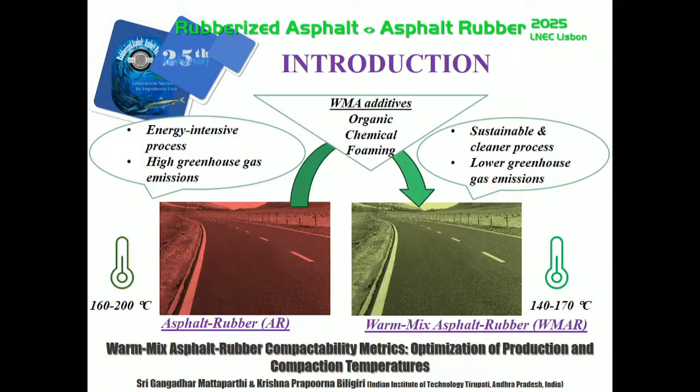For the unmodified binders, we can find the mixing and compaction temperatures using the ASTM, AVTS temperature susceptibility relationships. Whereas for the modified binders, such as asphalt rubber binders, these methods are not applicable, since viscosity depends not just on the temperature but also on the applied shear rate. Hence, we need to come up with a practical method that can be used at the laboratory level that can show the true mixing and compaction temperatures applicable. So we are proposing mixture-based methods along with the warm mix technologies that can be applied.

Hence, the objective of our research is to evaluate the effectiveness of the mixture compactability metrics of warm mix asphalt rubber mixtures prepared with 2 warm mix asphalt additives, and finally to know about the production and compaction temperatures and compare the reduction potential. The scope included preparation of AR binders and mix design to find out the optimum asphalt content that is required, and finally the proposed method, that is the asphalt mix compactability test method, to compare the reduction potential of the warm mix additives in warm mix asphalt rubber mixtures.

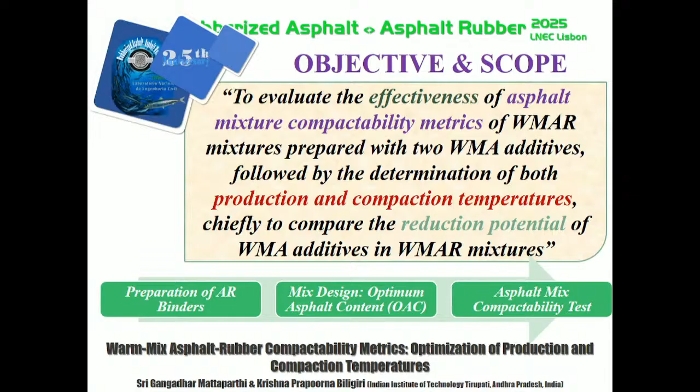As you can see, the asphalt binder that was used was viscosity graded VG30 binder and the crumb rubber of mesh size 30. It was blended with the local quarry aggregates that are obtained near our place. Regarding the warm mix asphalt additives, the 2 warm mix asphalt additives that were used were Aspha-min, which is commonly used in European nations, where it contains about 21% of water content in its structure, which will be released into the asphalt binder when heated in the temperature range.

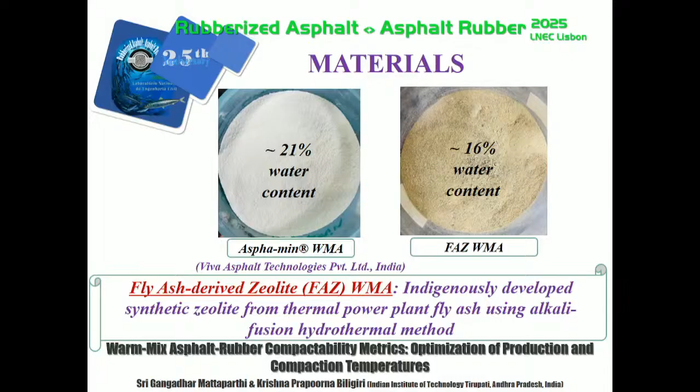So one more additive that we developed indigenously at our IIT Tirupati is from fly ash, where you collect the raw fly ash and calcinate it at a higher temperature so that it becomes reactive, and then you hydrolyze it for a certain time and temperature so that it can have 16% of water content in it, that will help foam the asphalt binders.

So using these, first we prepared the asphalt rubber binder, where the virgin binder was heated to a higher temperature and then mixed with 15 and 20% by weight of bitumen, and sheared at 1000 RPM for 90 minutes, where we get the AR15 and AR20 binders. 15 and 20 represent the rubber content in the respective binders. Then the binders are subjected to fundamental consistency tests such as penetration, softening point, and viscosity to know about the mixing and compaction temperatures using the conventional method.

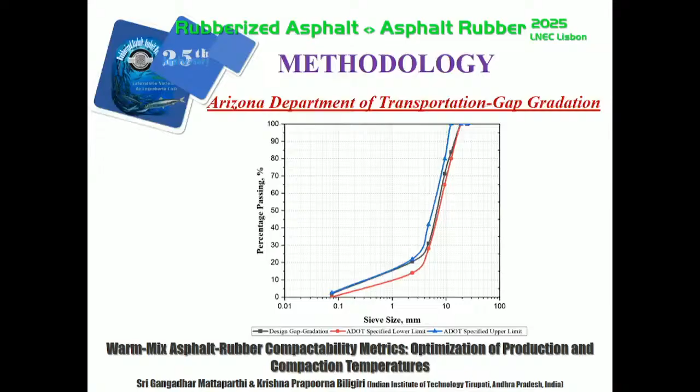And then we proposed the mixture method. So for that, we have adopted the Arizona DOT gap gradation, and the mix design was Superpave mix design. We limited the mixing temperature to 175 based on the Asphalt Institute recommendations, and the optimum asphalt content was based on air voids between 3 to 5%. So the methodology is that we prepare the control AR mixture at 175 and 160, and then the warm mix asphalt rubber mixtures were compacted at 3 different compaction temperatures, and the variation of air voids with compaction temperature was plotted to match the air voids content that gives the same performance.

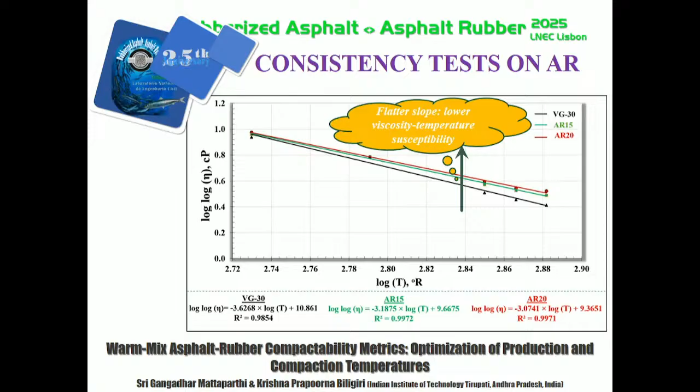As you can see, based on the consistency test, the AR20 binder has low viscosity temperature susceptibility, which means it performs better. If you calculate the mixing and compaction temperatures with the standard equiviscous approach, you can see there is a jump of about 40 degrees Celsius from the virgin binder to the AR20 binder. So if you heat the AR binder at such high temperatures, obviously there will be a lot of smoking effect, and the binder may lose its elasticity properties. So the mix design that was adopted gave us an optimum asphalt content of 5.8% for the AR15 gap graded mixtures and 6.2% for the AR20 gap graded mixtures.

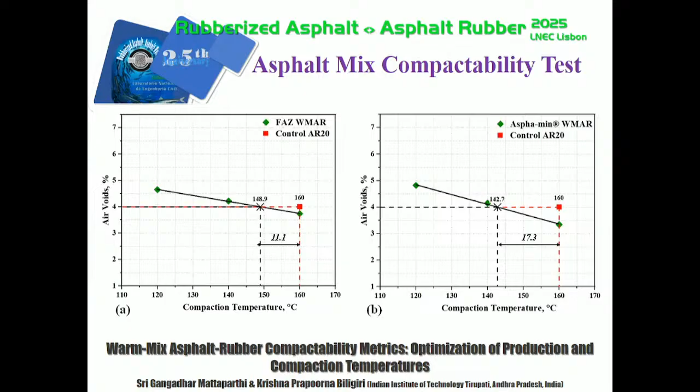As you can see, the foaming effect was observed with the asphalt binder when we added the zeolite. There is water that is foaming, and this helped reduce the viscosity temporarily and the production temperatures as well.

So the asphalt mix compactability test that was proposed was effective and practical to capture the temperature reduction potential when we use the foaming additives.

One more key takeaway from this research is that the fly ash additive that was developed contributes to the circular economy through the valorization of fly ash waste.

Moreover, the reduction potential that was observed is in line with the reductions claimed by the supplier, and hence this proposed method at the laboratory level is a more reliable and representative tool.

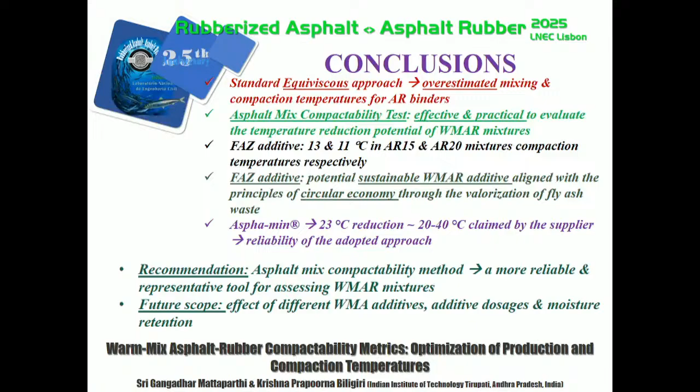Further, we need to assess different warm-mix asphalt additives and dosages to develop this method in the future.

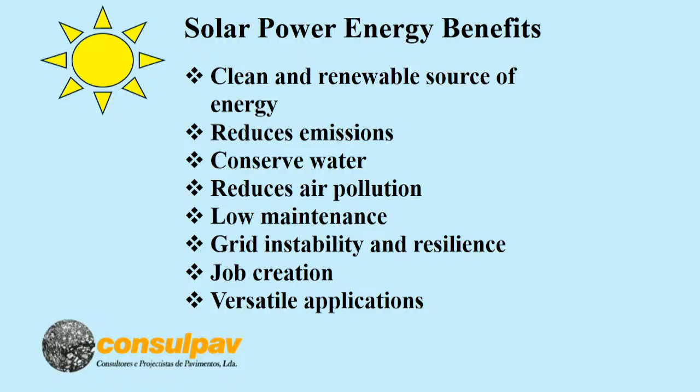Because everything with the sun is less CO2, less damage. Just take advantage of the energy provided by the sun. So let's make sure we combine both.

So very quickly, to make sure we really have a resilient, sustainable society, how about this? Very simple: we have rubber roads, and we have solar panels over the roads. What's wrong with the idea?

Look, the damage on the road decreases tremendously. No sun, no UV damage. No water, no moisture damage. So the pavement is going to last twice as long, for sure.

Anyway, some people had a similar idea, and they decided to put solar panels on the road. What do you think is going to happen? Okay, it's obvious: concrete that's broken by trucks.

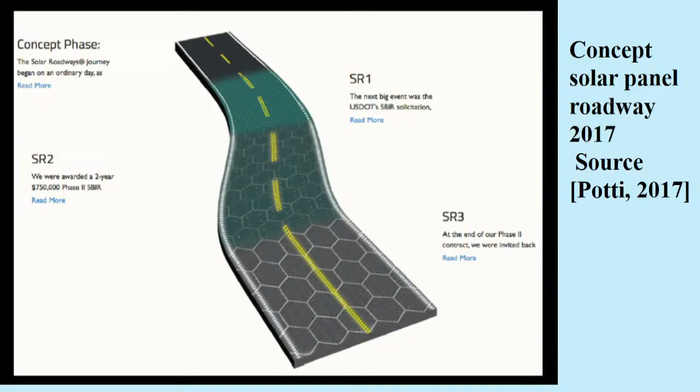So do you think a little plastic, something on top, is going to resist? So they put these, and obviously it got damaged. So you can have very creative ideas. I like the one on the bottom left.

Very beautiful here, but you know, you can save more money or less money. Be creative like this. And in the end, look at this: you have a lane that your car with induction keeps driving over and recharges. Obviously some software AI bills you for it, but it's possible.

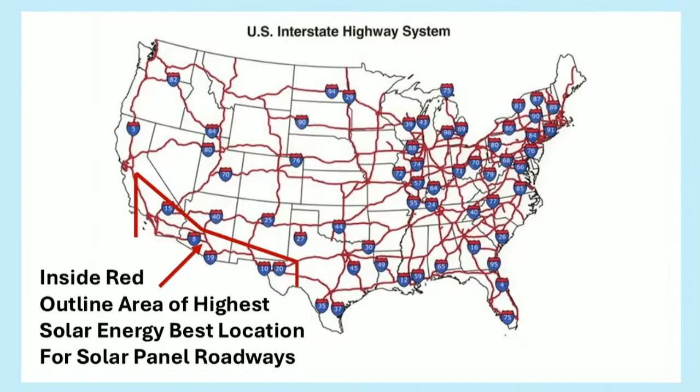So in red, there's the roads, left to right, that can be very easy to convert into solar roads. Actually, China is starting to think about this, roofing highways with solar panels in 2024, and they are considering this a possibility. I don't know if they've already started doing it, but at least there's a paper on it. And the amounts are amazing, the amounts of electricity you can generate with that.

So now, combining both, you have the benefit of the roads and the benefit of no sun and no moisture on the roads. So very quickly, that's it. Just a crazy idea. Bye-bye.